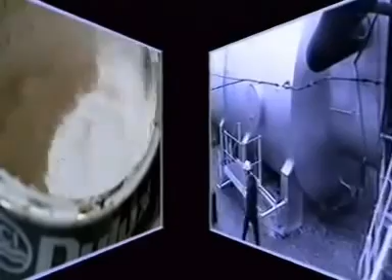Sulphuric acid is used in a wide range of processes. It is used in metal treatment, for drug manufacture, for paint, and the making of explosives.

The sulphuric acid plant in St Helens on Merseyside, owned by Hayes Chemicals, makes about 600 tons of acid per day. The plant is close to the local motorway network.

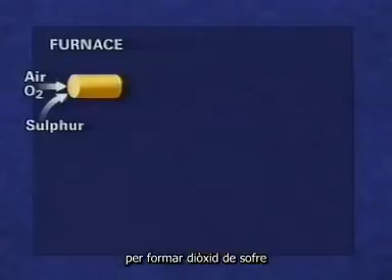At the Hayes plant, sulphuric acid is formed by burning sulphur in a furnace to form sulphur dioxide. In a converter, the sulphur dioxide reacts with more air to form sulphur trioxide.

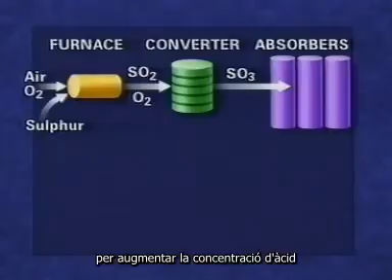In an absorber, the sulphur trioxide reacts with fairly concentrated sulphuric acid to increase the concentration of the acid. The acid is then diluted to the concentration needed by the customer. Some acid is recycled through the absorbers. Some is stored for sale.

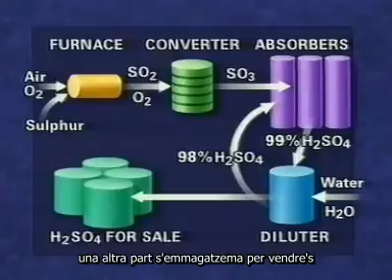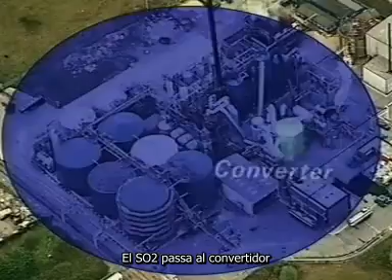This is the Hayes chemical site. The sulphur is burnt in a furnace. Sulphur dioxide passes to the converter. Sulphur trioxide is fed to the absorption towers to produce acid of the required concentration. This is then stored for delivery by tanker.

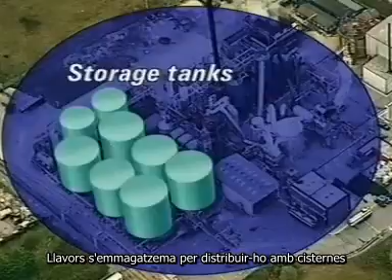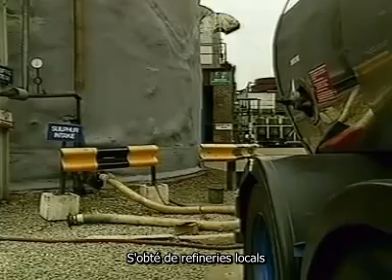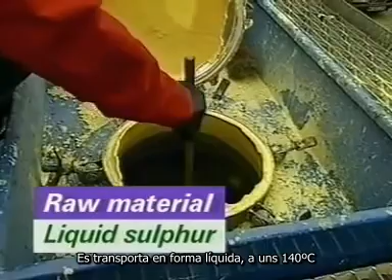This tanker is delivering sulphur. It's obtained from local refineries where it's been recovered from oil and gas. It's transported as a liquid at around 140 degrees Celsius. The liquid sulphur is sampled before being stored for acid production.

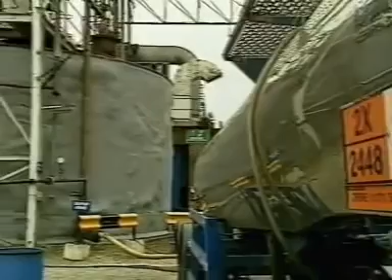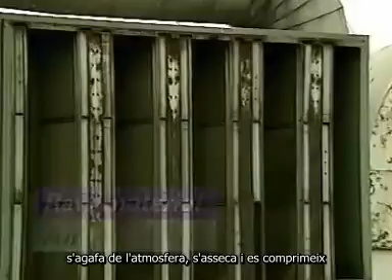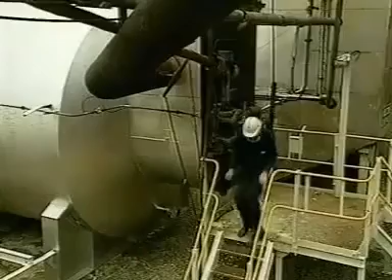Air, the second raw material, is drawn from the atmosphere, dried and compressed. The sulphur is sprayed into a furnace where it burns in the dry air. Sulphur combines with oxygen in the air to form sulphur dioxide.

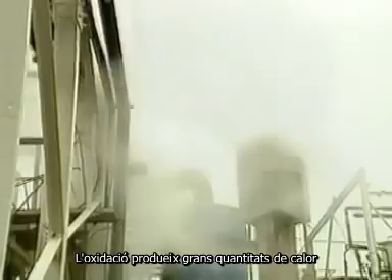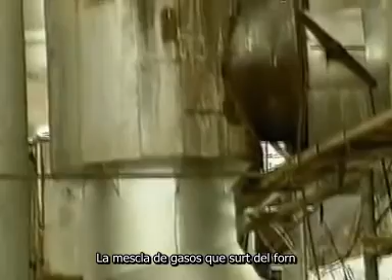The oxidation produces large amounts of heat. That heat is used to boil water to produce steam to generate electricity. The gas mixture which leaves the furnace contains sulphur dioxide and enough oxygen for the next stage.

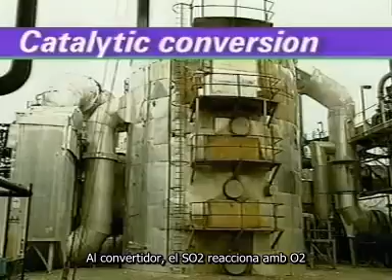In the converter, sulphur dioxide reacts with oxygen to produce sulphur trioxide. The reaction requires a catalyst, mainly vanadium pentoxide. This is most effective at 440 degrees Celsius. There are 4 beds of catalyst in the converter.

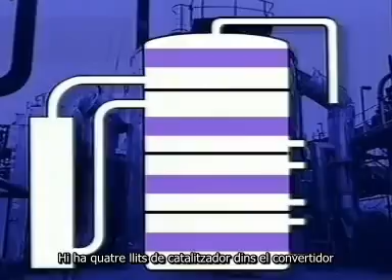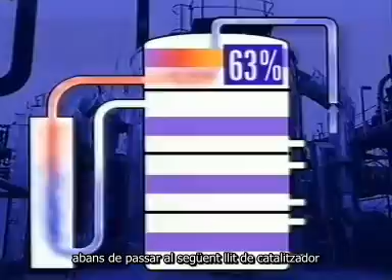The first catalyst bed converts about 63% of the sulphur dioxide to sulphur trioxide, and heat is produced. The gas stream is cooled before it passes to the next catalyst bed. Hot gas superheats steam from the furnace boiler.

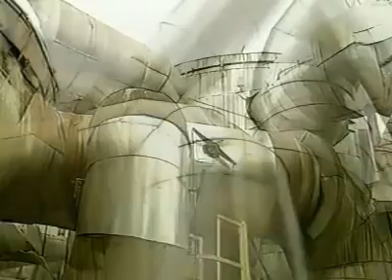The gas stream passes through 2 further catalyst beds and the percentage conversion increases. Between each stage, the hot gases have to be cooled. By the 3rd bed, about 95% of the original sulphur dioxide has been converted to sulphur trioxide.

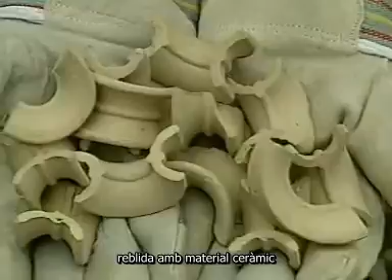After this catalyst bed, the gas stream is led into the bottom of an absorbing tower packed with ceramic material. The rising gas meets a stream of hot sulphuric acid that runs down the absorber. The sulphur trioxide reacts with the water in the acid to increase the concentration of the acid to about 99%.

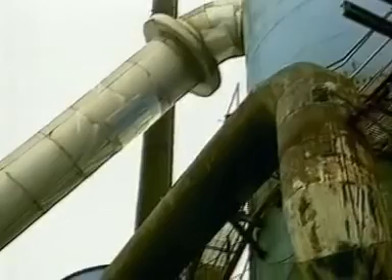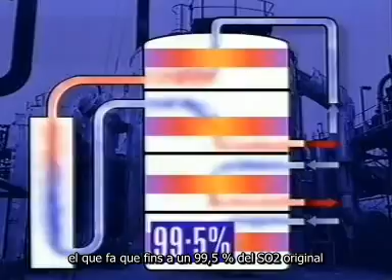The gas from the top of the tower still contains some sulphur dioxide and oxygen, and is fed back into the final bed of the converter, after which 99.5% of the original sulphur dioxide has changed to sulphur trioxide. Less than 0.5% of the original sulphur leaves the stack as sulphur dioxide.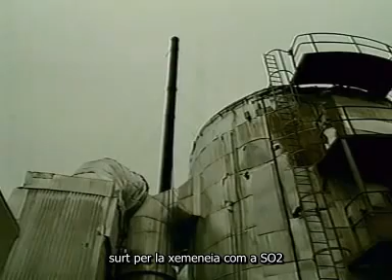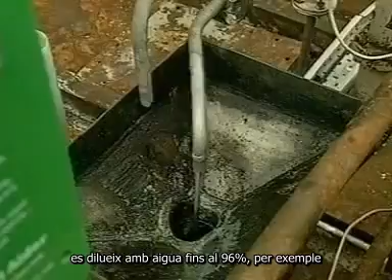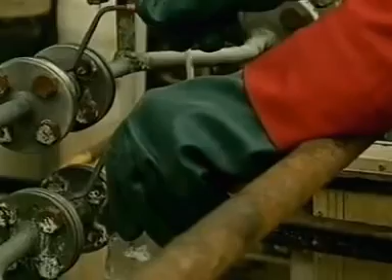The 99% concentrated acid is diluted with water to 96%, for example, and this increases the volume of the acid. This extra 3% is the volume of the acid that has been made. The acid concentration is checked by sampling.

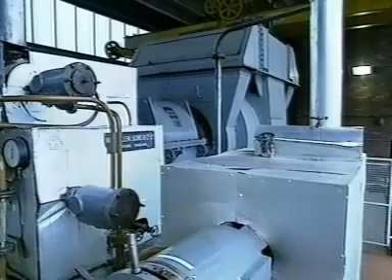Besides sulphuric acid, the plant generates a large amount of heat, which is used to produce high-temperature steam and make electricity. Electricity is sold to the national grid. The production process is controlled and monitored from a control room.